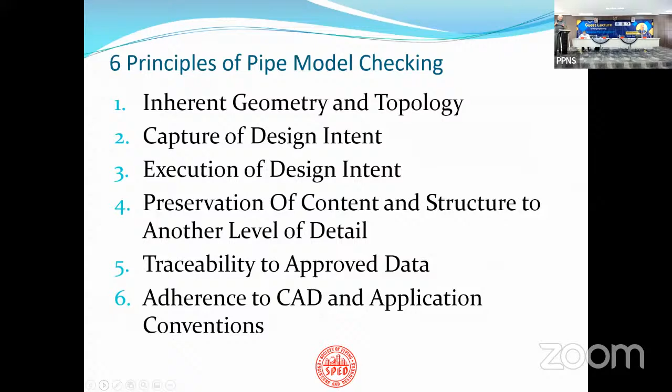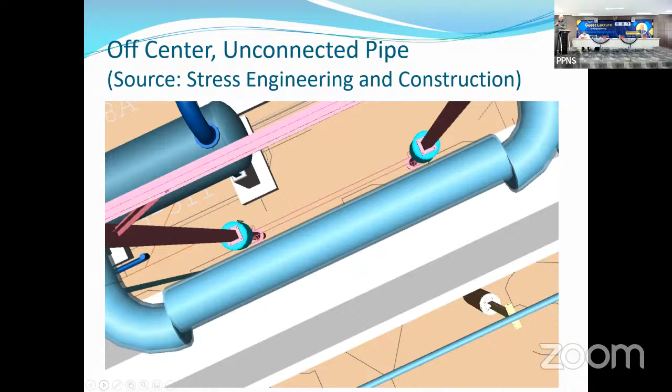For example, all pipe is connected. And if it's not connected, that's a problem. In the real world, all pipe is connected, so if you have a model where something's not connected, that's an error. That has nothing to do with the design - it has to do with the inherent nature of pipe.

Also, piping is a solid, so you can check and see if that solid thing ran into something else that's solid. That has to do with the nature of pipe, nothing about the design itself - it has to do with what pipe is.

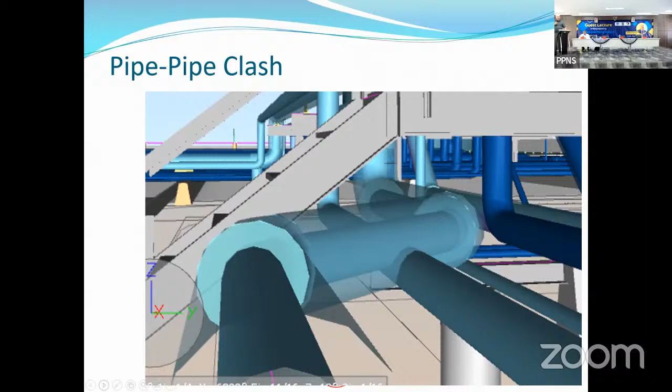Lines are connected. You don't want to have a design where something's not connected, so you can check and see if something is actually attached. That has to do with the nature of pipe - pipe doesn't hang in the air, it's connected to something.

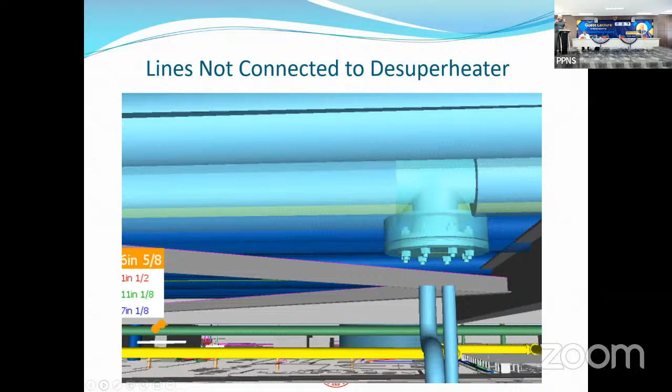And you see this often in other engineering models. Here's a stress model where some of these disconnects cause a database error in the piping model. You'll find that a lot of the work you do as a designer will be repurposed by an engineer doing stress analysis. So that data you create in one location will be used somewhere else, and these errors show up in the model - this is showing up in a stress model.

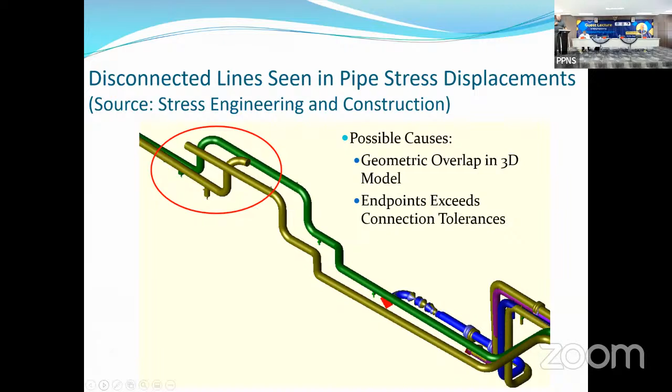Also, here's a topology check. The topology in a P&ID has to be preserved in the actual physical model - and you use P&IDs in shipbuilding. So we do a check. Everything should be there in the same order and connected the same way. And if it's not, that's a problem.

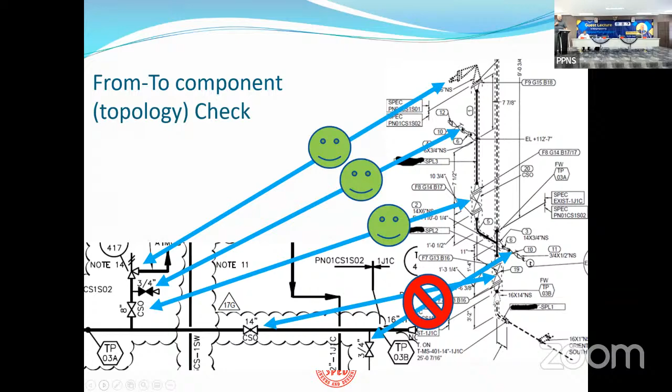Also best practices: engineers intend that you don't have pipe routed through access ways, that you don't have valve handles sticking out where they might get hit by a truck. Those are best practices - engineering intentions that you must carry forward into your design.

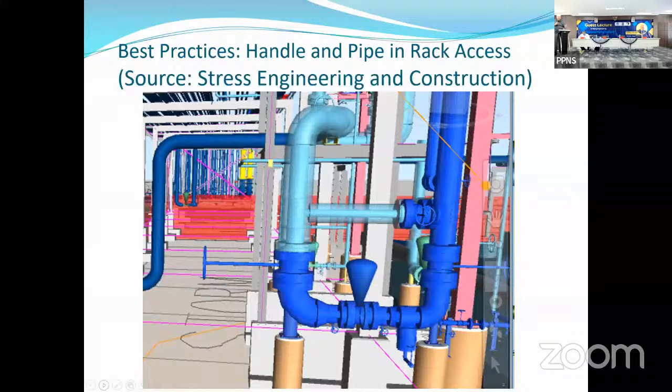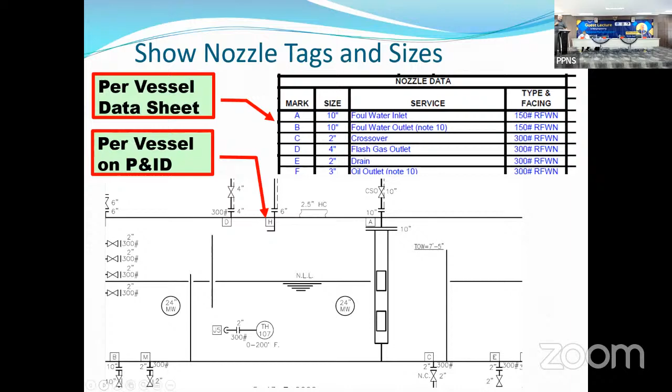Nozzle tagging: if you tag a nozzle in one document, it ought to be tagged the same way in another document. That correspondence is your responsibility. That's what you have to do.

Also traceability to approved data. When you have revisions to drawings, you have to show that all these changes you made are traceable to an approved piece of data. That's a traceability problem.

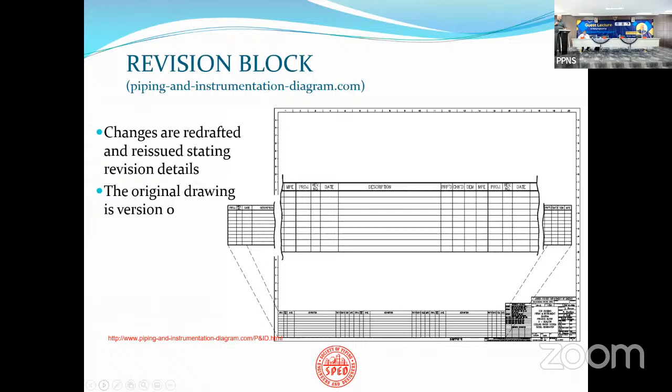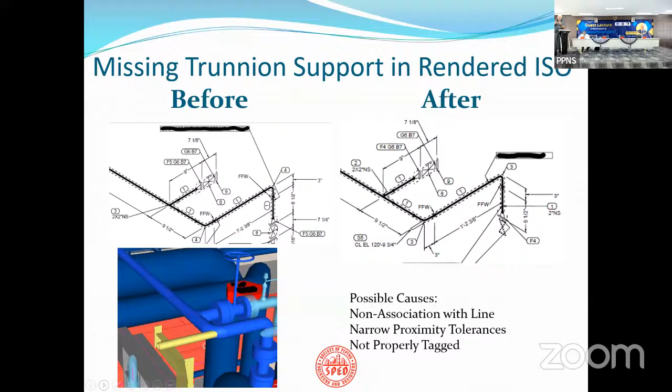And here's a rendering problem. Here's a trunnion that was actually in the model, but did not come out as a rendered isometric. Why did that happen? It was because it didn't obey the conventions of the CAD system. You had to encode it the way the CAD system wanted to see it, or it would not come out properly.

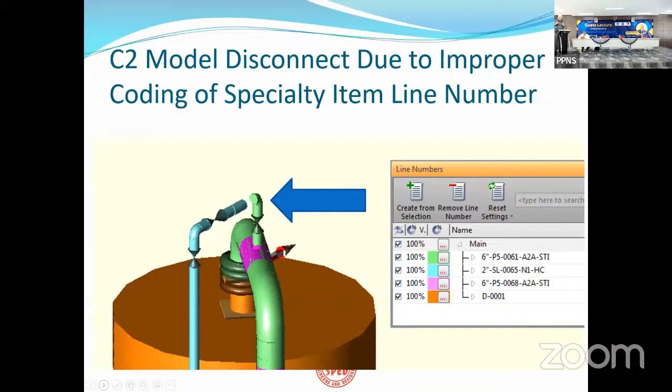Here's a model that disappeared because it had the wrong spec. The model you see here was extracted based on a piping spec, and this one item was not properly coded with the spec, so it didn't show up. That's an encoding problem.

Here's another situation - an orphan vent valve, orphan because it was miscoded with the wrong spec. We've isolated items according to spec. This other item showed up and it shouldn't have been there - it should have been on a different spec.

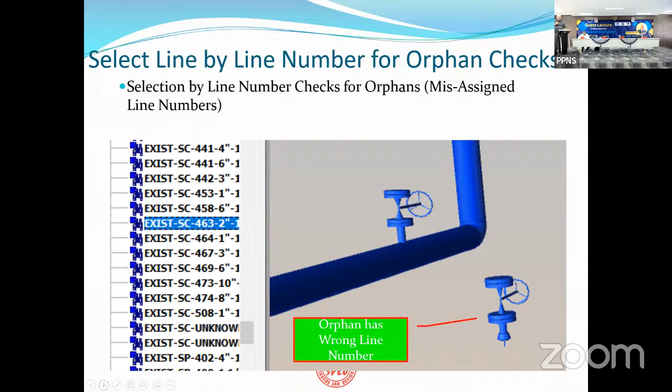So these are the kinds of things that you'll be checking as a piping designer, as a piping engineer. You'll be responsible for encoding this data correctly. You'll be in charge of preserving data integrity, and accepting data from another source like a scan and bringing it up to the proper level with the proper conventions in a CAD system. That'll be your job, and it's an important job too.

Let's talk about the future. Now, is there any money in piping? Does anybody care about piping? Well, let me give you an example here.

Here's a refinery - let's see what it makes. With the cost of money at 4%, here's a refinery that makes $5 million a day. What's that refinery worth? $45 billion, if it makes $5 million a day. All you have to do is get it to run right from the first day. From the very first day that refinery runs right, it's worth $45 billion. So is piping important? When you design a plant, if the piping is right and the plant works the first day, the company just got rich by $45 billion. That's the kind of money at stake in these systems.

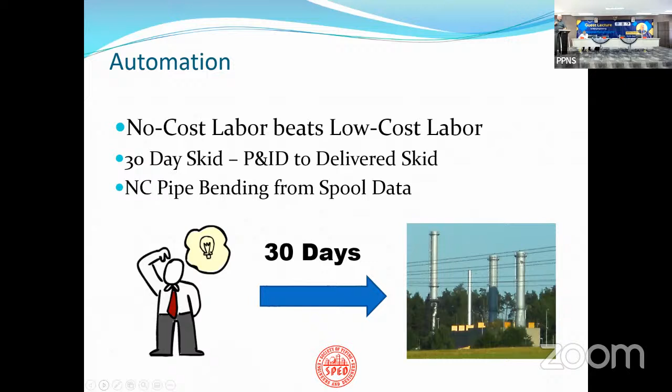Now, the other thing to understand about what's happening in the piping profession is that everybody's worried about sending work out overseas to low-cost design centers. But the answer to low-cost design centers is no-cost design centers - when you automate, you eliminate labor completely. I think there'll be a day soon when somebody will have a design for a plant, and 30 days later there'll be a physical plant. And who can execute at that rate of speed? Let's say a ship - somebody wants a ship, they get a big order, the ship has to be ready in so many days. Can they execute? If they can execute, they can get the order. So it's all about who can execute, and execute correctly.

You'll see more imaging. In process plants, they don't want piping designers to go into the physical plant, so they do a scan of the plant and you work off the scan data. But how does that data get brought up to the content needed by your CAD system? You have to find out what's in the scan, and put nozzles and structures in according to what's there. That's your job, that's what you'll be doing.

You'll see more and more scan data: local scans, handheld scans, all kinds of different issues in scanning, photogrammetry, and putting physical models back into scans. That's what you'll be doing. It's a totally new area.

We're now working with new areas. We used to work with steel a lot. Now we're working with plastic, high density polyethylene, fiberglass reinforced pipe, all kinds of new materials. The more temperature these materials can stand, the more steel pipe they replace. The problem with steel pipe is it corrodes, it collects barnacles, it rusts away. But fiberglass and plastic don't rust, so everyone wants to go plastic if they can.

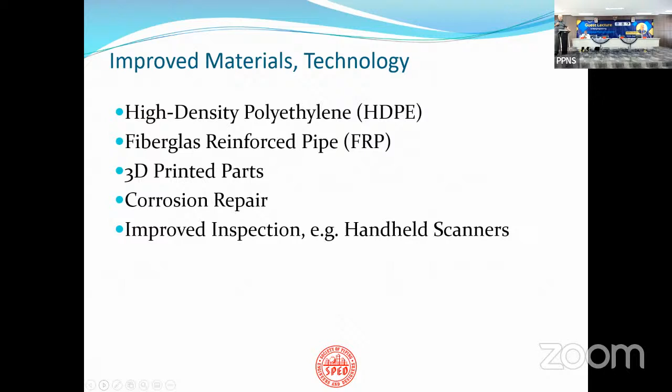Another issue is remote collaboration. It's here to stay - some of the work will be done in the U.S., some in Kuala Lumpur, some in Beijing, and some in Surabaya. People will transmit models to you, you work on the model and add to it, and transmit it back. That's here to stay.

So now the question in the US is, how do I manage these kinds of processes? We have sun-never-sets design, evergreen design - we're always working on it somewhere in the world. How do you manage jobs like that? How do I qualify you? How do I know you're capable of doing this design, that you have the skills? I don't know that, I have to find a way to qualify you. How do I do that? And how do I manage the work - how do I tell you what I need so you can do it? That's a big issue in the US right now: how to manage remote collaborative design.

You're probably wondering if there's going to be a future for you. Has anyone been watching the price of oil lately? I know I do. It goes up and it goes down, but I'll tell you, it's been up and it's going to stay up. That means there's going to be a big demand for oil in different locations of the world, demand for shipping it around, demand for liquefied natural gas - huge demand.